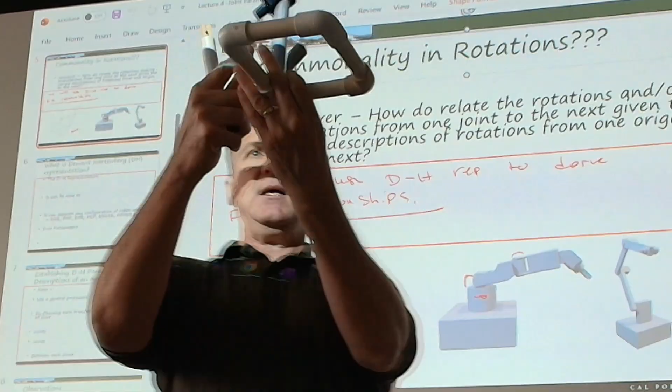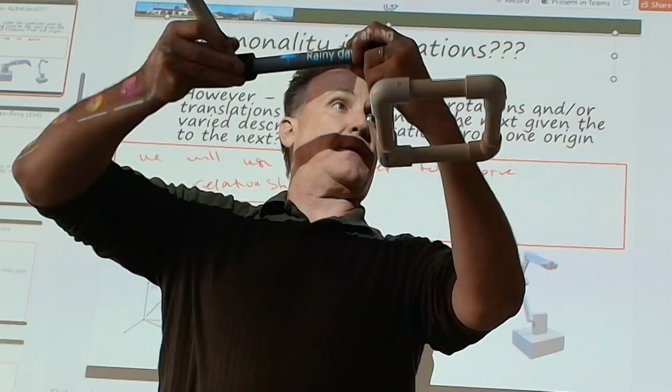And then we got into this idea of this articulated arm. In this articulated arm, I could literally say I've got a joint that's from this base that's going to spin like this, right? And like this, and like this, and these could both. I mean theoretically I could have these two be two separate articulating joints if I wanted to, right? I could do this. There's a lot of degrees of freedom in this robot. And it could be cylindrical, it could be spherical, or some combination thereof, right?

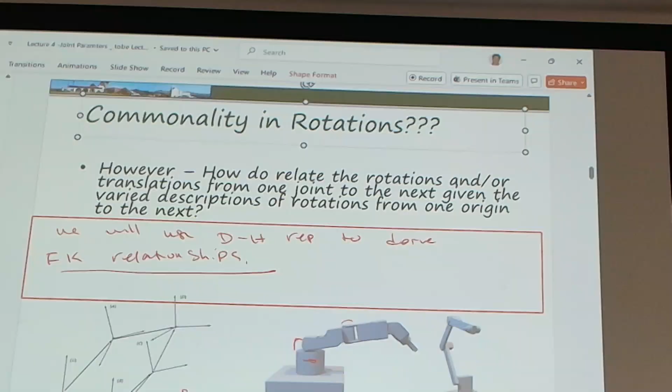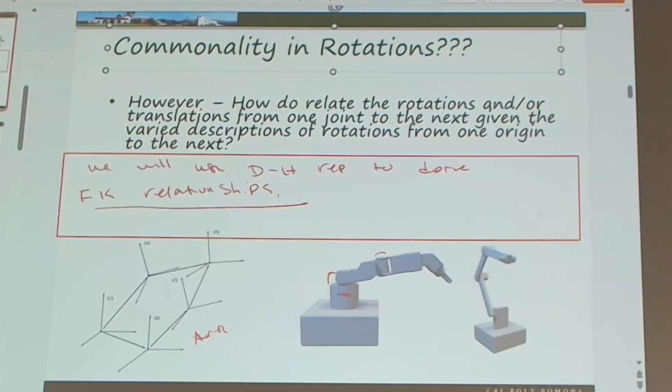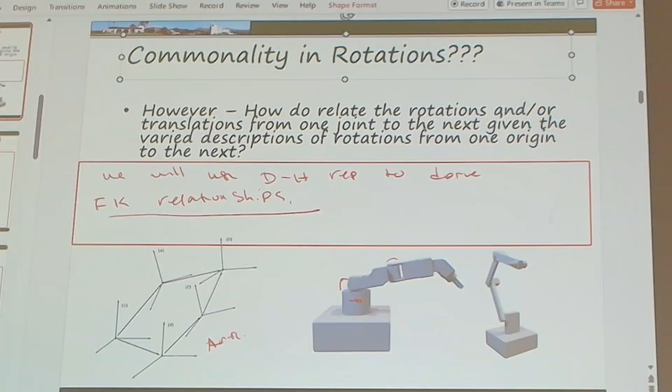So the question is how do we succinctly, how do we concisely describe the parameters relative to one another for the forward kinematics? Because as we saw, if this was the orientation and I'm going to move this one and then this one, it would be a planar robot. But if that one could move, now all of a sudden it's no longer moving in that same plane, is it? So I've had to somehow capture what that twist was, and maybe it's a fixed twist. Maybe it's not even a joint that's allowed to move, maybe it's just rotated. So now this one moves this way, and this one moves this way. So how do I describe that twist from this joint to this joint?

If I said it's not a controllable joint, it's just fixed - I mounted the motor 90 degrees. Remember when we were building the arm in Coppelia and we rotated that motor? This has got that joint motor rotated by 90 degrees. And that reminds me, I owe you guys a video to post. If I don't do it, someone feel free to send me a note saying I forgot to give you guys that video. But that's what's in there, right?

So how do we describe that? How do we express the relationship of that twist? It's not a joint that's moving, per se.

How do we make the difference between this axis rotating and maybe this does rotate that way? I mean, there could be that relationship.

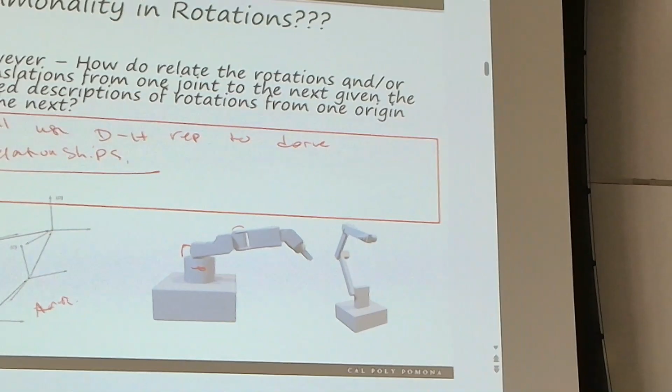So how do we do that in a repeated manner? That's where the Denavit-Hartenberg representations come into play. So when we look at this, what is the Denavit-Hartenberg representation?

So the DH parameter representation... okay, so it's a simple method, and I say simple in quotes because I think it's simple, but it could be way more complex. But it is a method. I'm going to still say a simple method.

Once you get the hang of it, you'll say simple as well. It's a way to model how robot links and joints - and when I say joints, it doesn't matter if the joint is prismatic or revolute - regardless of configuration to one another.

That's what Denavit-Hartenberg is striving to achieve. That's a very big statement with a lot of dependencies behind it. So, well, we understand what those letters and words on that page mean. Putting that into practice is obviously going to be a bigger picture.

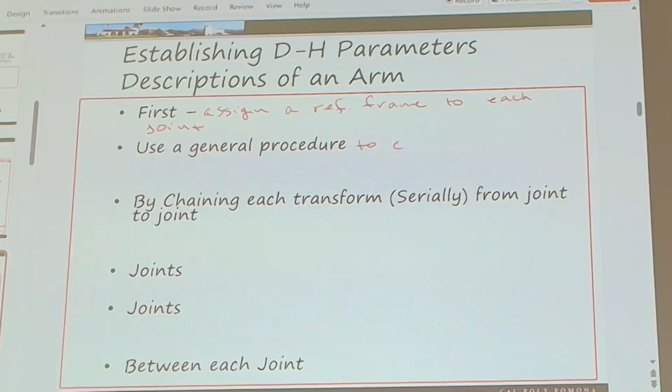Then what we're going to do is use a general procedure to create a transform from one joint, from joint J, to the next joint, J plus 1. So we're going to assign a reference frame, and then we have a general procedure which allows us to connect one joint to the next.

So we have this joint here, and this joint here, and there could be a twist in that joint relationship. There could be a link in that joint relationship. We want to capture that characteristic - which way we're rotating, if we're going to rotate about this joint, or maybe there's a prismatic joint that's going to move along, having linear motion. We want to be able to capture all of that.

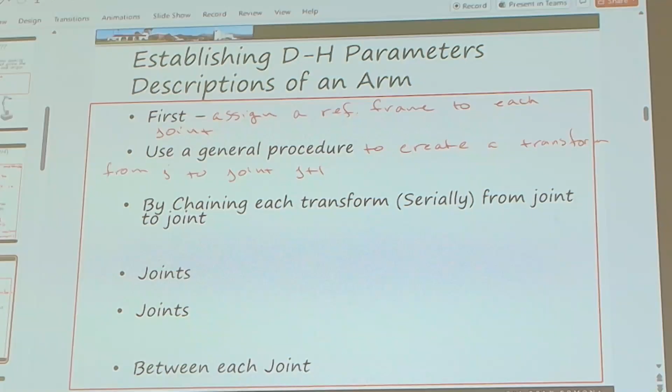So that's our objective. And so what we're going to do is chain one joint to the next in a serial fashion. This is why this is called serial kinematics - that's the whole idea here. So we are chaining these transforms, and this is where we get the expression serial kinematics. We're going to do that from each joint, from one to the other.

And by doing so, we create the robot's overall transform.

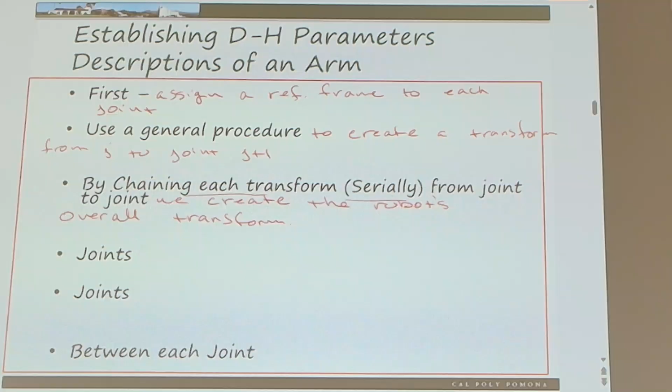So if I have a transform which describes relationships from this joint to this joint, to this joint, and so on, from the base to the tip, I can multiply each one of these transforms together and thereby have a transform that represents the entire arm. So I can describe, through all these joints, that spot that the robot's currently touching.

And if I want to apply a certain set of forward kinematics, I can move it from this point, say down to picking up something over here. I can say I want to move it to over here. I can apply another set of motions to make it go over there.

I can also arrive at what that transform looks like by solving for the inverse kinematics. That is, I can solve this given the two points, this point and this point. Remember, the inverse kinematics solves that transform matrix, how to get there. And if I do that, I can decompose each one of these from that one overall matrix, and figure out the next successive transforms themselves.

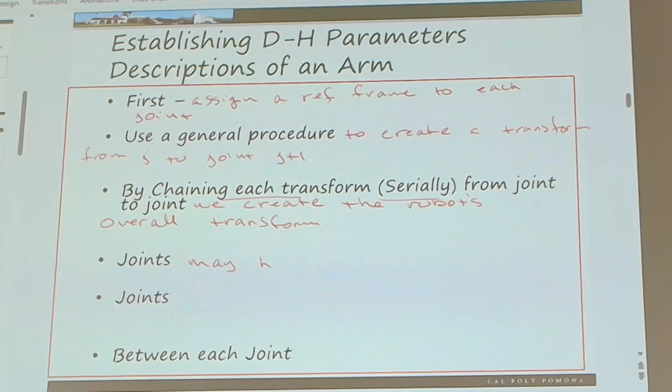So we have to ask ourselves, what in fact is a robotic joint? What is a robotic joint? A robot joint may be prismatic or revolute. Prismatic, if you recall, that's linear, and revolute is the rotation. But we don't call them those, we call it prismatic and revolute.

Moreover, each joint, and this is a constraint we place for the DH parameters, is considered to only have, this is key, one degree of freedom.

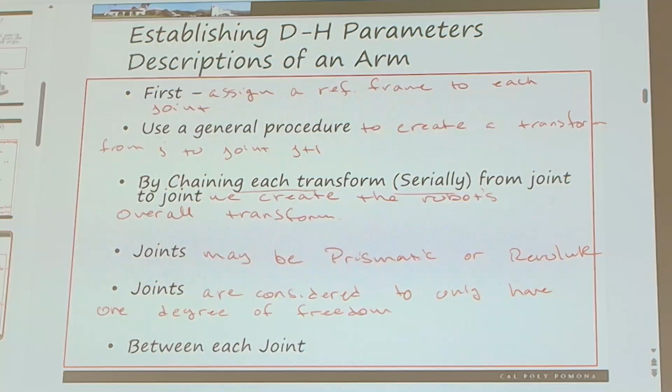Between any one of these two joints, so for example, I have a joint here and a joint here. Let's call this joint 0, joint 1, joint 2. Between joint 1 and joint 2, I have a link. I have a joint, I have a link. Everybody with me on that? So, definition of terms: between each joint is a link. What's between each joint? A link.

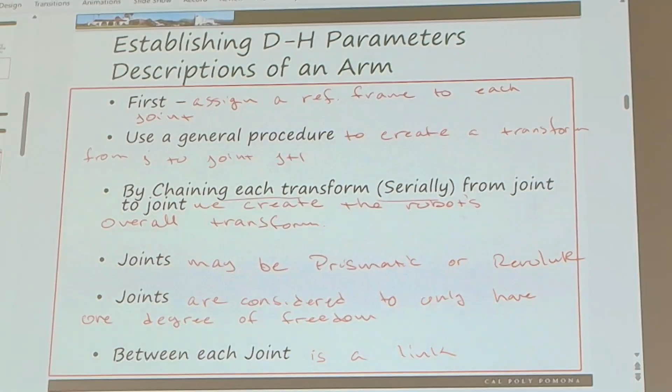What kind of joints can we have? Revolute. Prismatic.

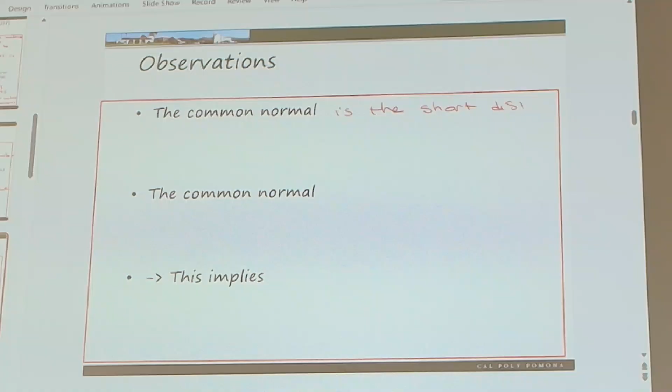Couple of observations. A common normal - what is a common normal? We're going to define that for you guys right now. The common normal is the shortest. In fact, let's just think about what this is. A normal is a perpendicular, right? Perpendicular between things that have something in common, right? So it's the shortest distance between any two mutually perpendicular lines.

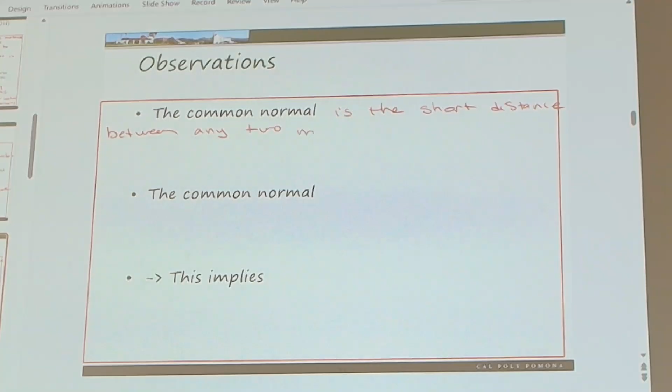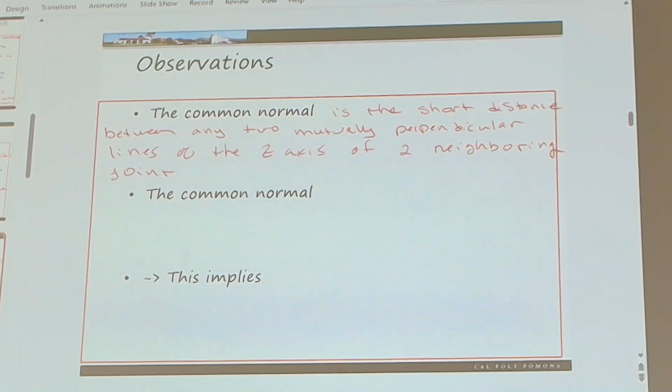The common normal, the normals - so that's kind of the plural, the common normal - are not necessarily at an intersection or collinear.

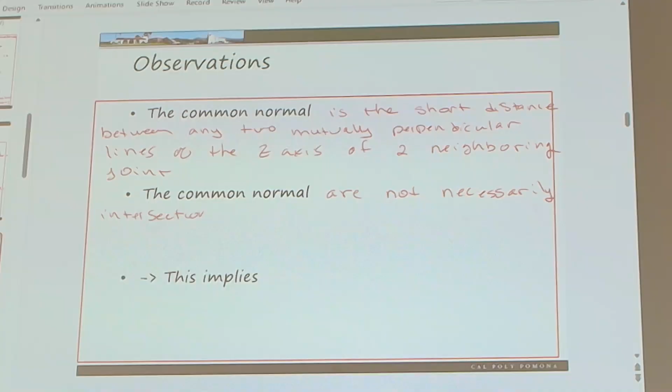And what this implies is that the origins of two successive frames may not be at the same location.

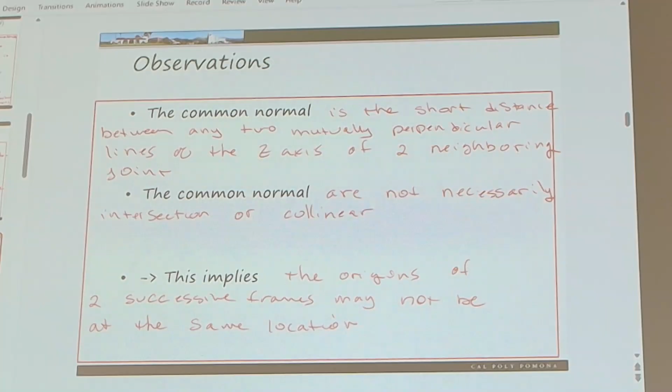And that makes sense, right? The frame for this joint is not the same location as the frame for that joint.

It could be though. Wait, what? What it means is we'll find out that when I do a rotation, does it matter if I say it's rotating here or if it's rotating here? Doesn't matter. But this guy clearly is not rotating there, right? So the way I have this planar and this planar here, they're not rotating - they can't rotate. But if this has a rotation joint here, I could say it's actually rotating at that point and rotating at that point, not necessarily down here. That translation doesn't have a whole lot of meaning to what I'm going to do for the rotation. Okay, we got that so far?

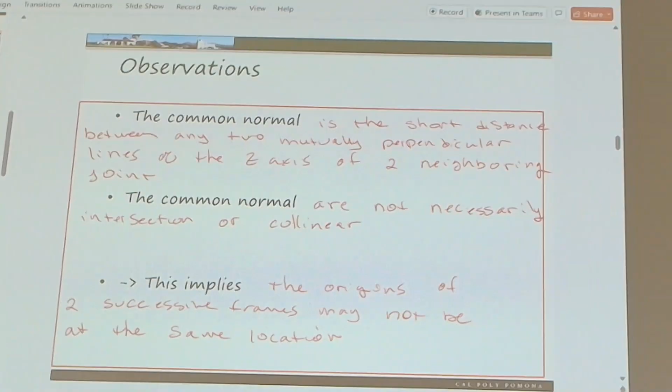In that case, would there still be a link between the two guys? Not necessarily, we may not have to worry about it. We can ignore it. Yeah, exactly, but there's one right there. No, not necessarily, it depends on how you define it.

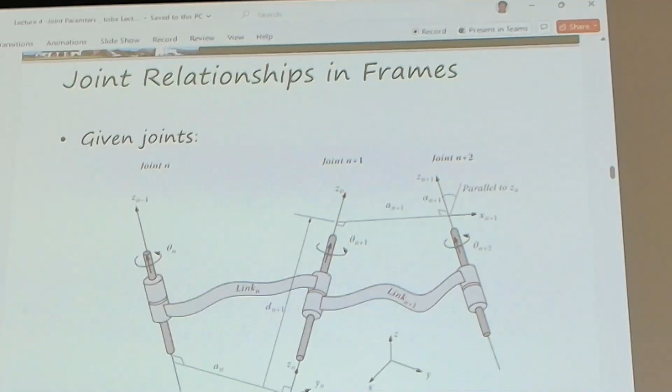So let's talk about this diagram that gets everybody confused. We're going to spend some time on it. This is why I used to draw it as part of the lecture. I don't do that anymore. I don't know if it's good or bad to not be drawing it. In some ways it did help, because as I was constructing it, I walked through it. So by all means, if you want to draw it, please do so.

What we have here is joint N. Let's just say that joint N is down here, and that joint is revolute, right here, so it's doing this. N plus 1 is going to be right here, and it's rotating like this. N plus 2, or that joint—I could have said this is N plus 2, and this is N plus 3.

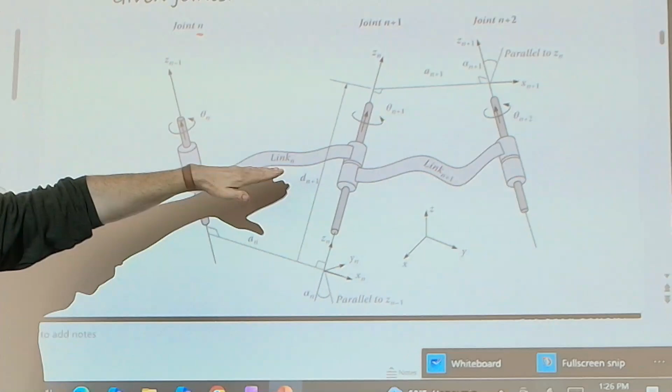Between each joint, joint N and joint N plus 1, I'm going to have link N. So I have a joint connecting a joint, and notice the diagram shows this perpendicular line here—totally different axis. This is a right angle, and this is a right angle. This is that mutual perpendicular, perpendicular to both z-axes. It's the shortest line, isn't it?

That is going to be what we call our link length, and we'll write this down in another slide. The link is not the traversal length—it is the shortest distance between my two z-axes. For joint N, I'm going to have a theta N that I'm rotating.

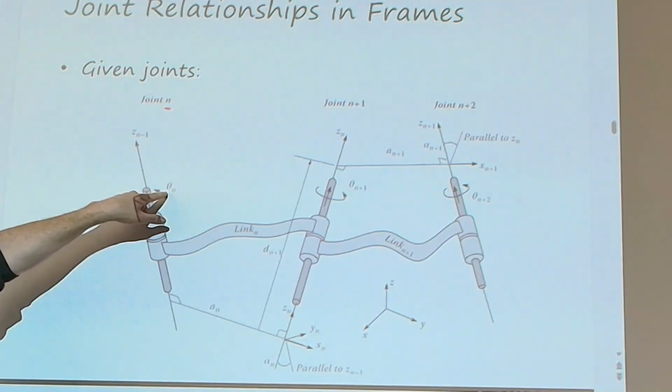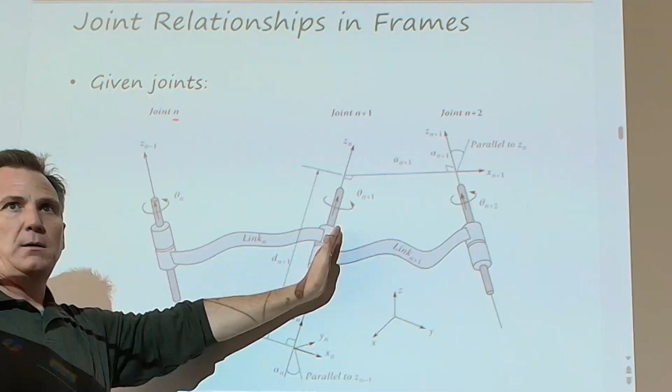Now, what I'm describing is the Niku notation. If you were to look at Craig, the subscripts are different. In Craig, this would be n, and this would be n plus 1. This would be Zn plus 1. In Niku, we're looking forward as our n—we look back and look forward. In Craig, we're continually looking forward. It's the same thing at the end of the day, and you'll get really comfortable with it.

But if you look at the Craig book, which is probably one of the most popular robotics books that exists, Craig uses a slightly different notation. I've lectured both in the past—I started with just Craig and then went to Niku. I don't know which is better. A couple of years ago I just switched to strictly Niku and explained the differences. I want you guys to be aware of the differences used in literature, because there is a difference—neither one's wrong, neither one's right. It's simply a matter of perspective, and where you came from and where you're going, when we describe the serial connectivity from joint to joint to joint. Everybody with me on that?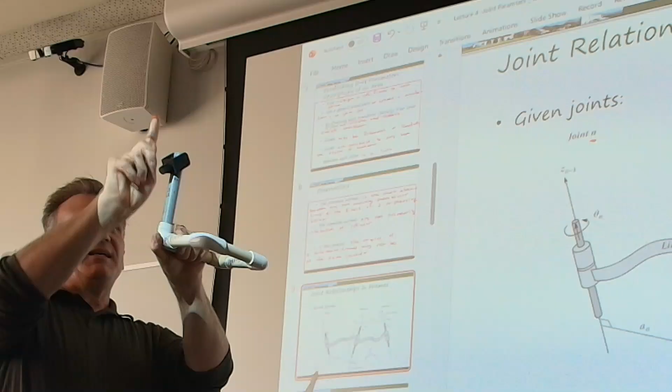So notice we have this z-axis for joint N, and it's about Zn minus 1. I am about theta n, so that joint right here has a motion. This is isolated—it's this guy right here, it's turning this guy right here. My z-axis is coming up. Everybody see that? Zn minus 1, my theta n axis. This is joint n, I have theta n.

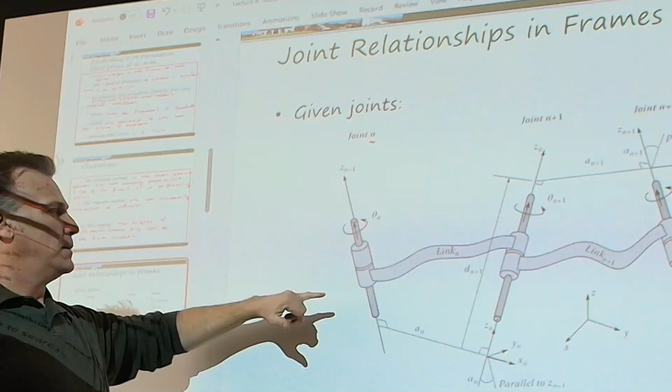To get to joint n plus 1, I have this common normal between my two z-axes. This is the link. Between the two z-axes is the link. This is the joint displacement, theta right here. It rotates about the z-axis. In fact, every joint motion is about the z-axis or along the z-axis.

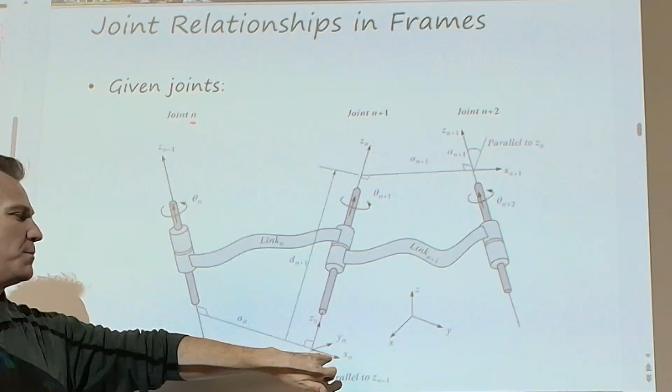Now, to get to this orientation, z is pointing this way, now I have a z pointing that way, so I have a rotation about some axis—in this case it's going to be my x-axis. It's rotated about my x, and there's my x. Here's my z. I'm going to rotate about my x-axis to get to the new rotation, by alpha. That's alpha n.

Wake up. Here we go.

Again, my mutual perpendicular, A, is the distance between my two z's. So I have frame n minus 1, frame n. All motion is about my z-axis, or taking that common perpendicular. If I displace along z, that displacement is known as d.

So my displacement along z is d. My joint displacement, if I had a prismatic joint moving inward and outward, that's going to be by an amount d. So my joint can move about z, along z. The axis we control is the z-axis.

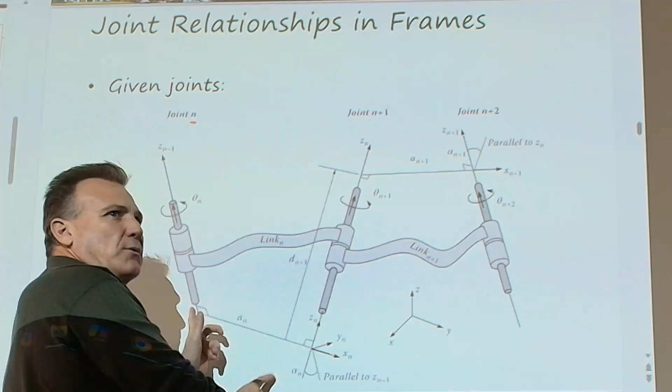That is the axis of motion. The axis of link to link is going to be along this guy here, which we make our two x-axes co-aligned. We make them co-aligned by a twist, alpha. Twisting by alpha is a way of aligning my x-axes so that my z's are pointing in the right direction.

Here's my joint. My z is going to be coming up here. I'm going to build the arm as we go. Now all of a sudden this guy is rotating this way. It's no longer rotating this way, right?

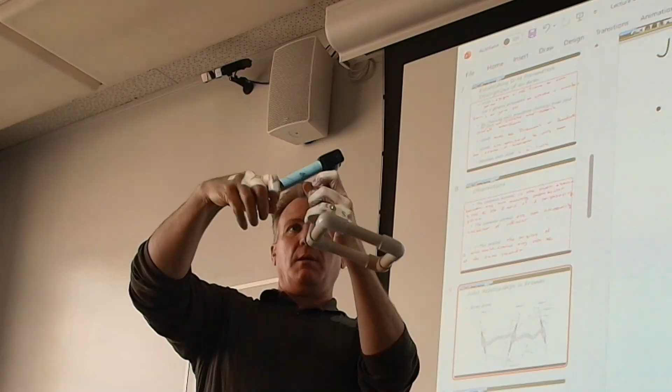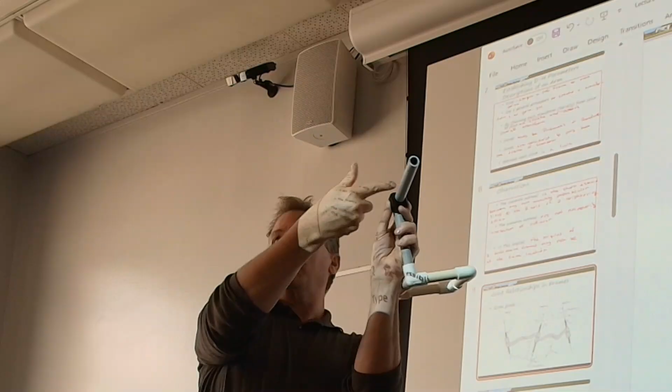It's rotating this way. So where's my new z-axis? It's coming through here, right? My z-axis is literally through the joint right here. So z went from here to here, following the right-hand rule: x cross y is z.

What is doing that rotation is alpha. It's the twist in the joint. So this has a 90-degree twist going from the vertical to make it into this direction, so that this is my joint, which means I have to rotate about z.

If I'm going to rotate about z, that means z has to be this direction. How did I get it in this direction? I rotated alpha by 90 degrees. I also have this A sub n, that's this length right here. If I had a displacement inward and outward doing this, then that would be my z-axis inward and outward.

So that's the idea of having this z. Motions are about z. The physical structure is about x. Professor, but what about y? Can't I do y? Yes, but no.

We'll get to y, and we'll see an example - I'll give you guys this in the book. By rotating an additional 90 degrees about x, that is 90 degrees. Remember, I'm rotating about z, right? If I'm going z and I want to add 90 degrees, what does x become?

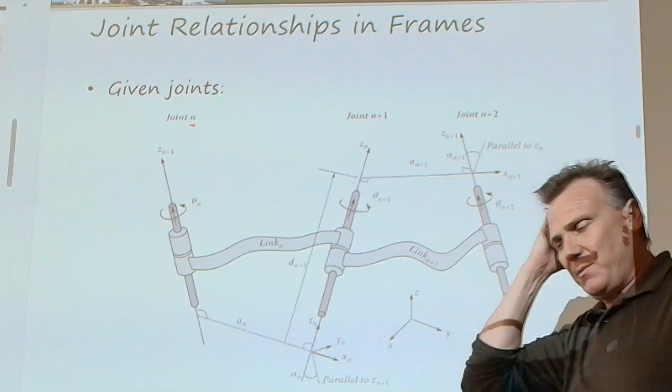What's my transform to rotate about z? Upper left corner is cosine theta, then minus sine theta, 0, Px. Next row: sine theta, cosine theta, 0, Py. Next: 0, 0, 1, Pz. Then 0, 0, 0, 1. There you go, that's the rotation matrix, the transform.

Wake up - it's because I don't have it plugged in. It doesn't like this power supply going through here. I know it didn't have a battery, I charged it last night - at least I thought I charged it last night. Yeah, I've got plenty of charge. There we go. Okay, where are we? What I should do is just plug in a different one. Well, it's waking back up again. Let's just do it higher for this guy. I'm just going to plug it in right here.

All right, so I can rotate. If I take a transform of this rotation of theta, I can do that, right? And instead of saying cosine 90, my variable, my joint variable of how much I'm rotating becomes theta, cosine theta. Now, alpha, that may be fixed, and generally is fixed.

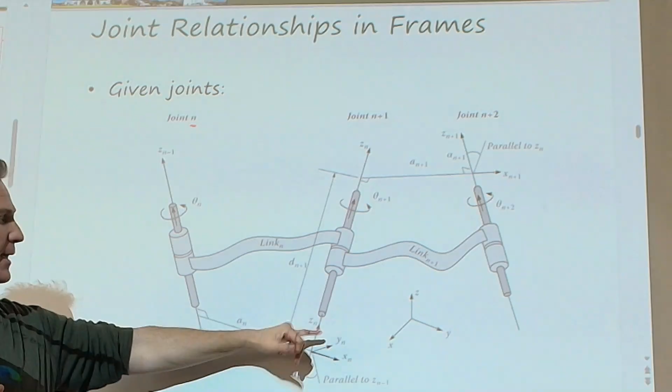And if I have to rotate about the y, instead of it being cosine theta or sine theta, it's theta plus 90. Problem solved.

Now, I said sometimes we actually move along z. If I have an offset, if this joint and this joint are not right here, but this link actually had some spacing between it, then d would have a fixed value. It's no longer the joint variable of traversal, it's actually some offset. Sometimes that gets students confused, and sometimes I might have that traversal, and I really do have a theta as a fixed value, because I did rotate about, I have an angular offset now about that rotational joint.

So it's not always this or that. Sometimes we might see both. Sometimes students don't realize that and don't feel bad. When I was an undergrad student taking this class, I was like, oh, it's always a 0. No, it's not. Or oh, it's always this or it's always that. No, it's not, it could be both. I won't talk about the instructor because he just didn't explain that.

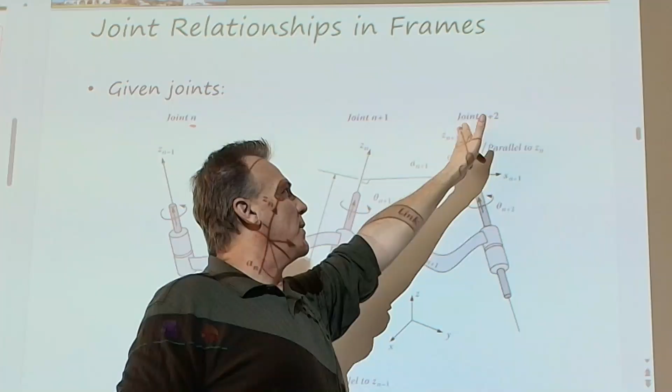But anyways, nonetheless, then we rinse and repeat as we go from this joint to this joint. So now we go to joint n plus 2. Again, Niku's notation has us the n minus 1 from that joint. So this is always the z minus 1. And this is where Craig and Niku differ, just kind of giving you the heads up. Same concept, same process, it's just how you identify going forward or going backwards.

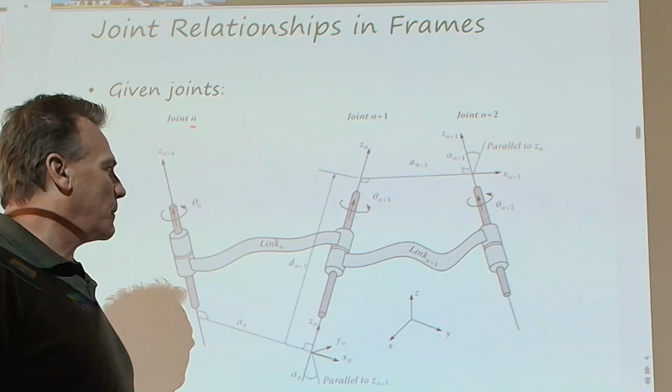So there's always a link between the two. Well, there doesn't have to be. What if this had a rotation? What if I said, you know what, I don't really care about this part, it's not doing anything for me. It's going to rotate, and then I'm going to have an alpha twist right in it. I could put that together, believe it or not. So those actually can combine.

We'll see an example. We're going to do a lot of homework examples on this one, this whole concept. But this is serial robotics.

All the stuff we've been doing up to this point has been describing the concepts of forward kinematics, the concepts of inverse kinematics, the concepts of a transform. Why do we need to have transforms? What is a rotation? Why does a rotation work? Why is rotation nothing more than the projection? All that stuff has really been a tool to help us identify these diagrams.

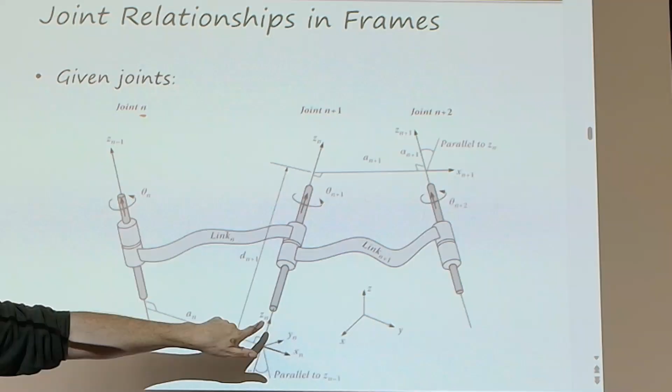Everybody with me? I have a question. Yes, sir. When we're talking about alpha, alpha n specifically, that's the angle between the two z-axes? Yes, it is. Actually, it is. It's exactly what we're showing.

Okay, everybody with me on that? Like I said, sometimes I used to draw these. I don't know if it's better to have it pre-drawn for you, trying to understand my chicken scratch, or if it's better just to see it already done. You guys tell me, what would you prefer? Already done. Okay, fair enough.

And this is the diagram from the book as well. So if you were thinking it's the same, it's the same. So notice that we have... You guys can see the pointer? Yeah, so notice that over on this one, the mutual perpendicular is right here, right?

Shortest distance between two z's, that's what you want to think of. So here's the z, and here's the next z. There's an alpha twist about the x. It's kind of hard to see that in here. You just have to kind of say, okay, I get it.

I'll be honest with you, it's not as... 100%. One of these days, I'll actually create a 3D model that allows you to play with this and stick it in here. I haven't done that yet. That's on my to-do list. Usually, I always get usurped by any number of other things I have to do. So one day when I have absolutely nothing to do in my life, I'll probably do that. The likelihood of that happening is probably 0 to none.

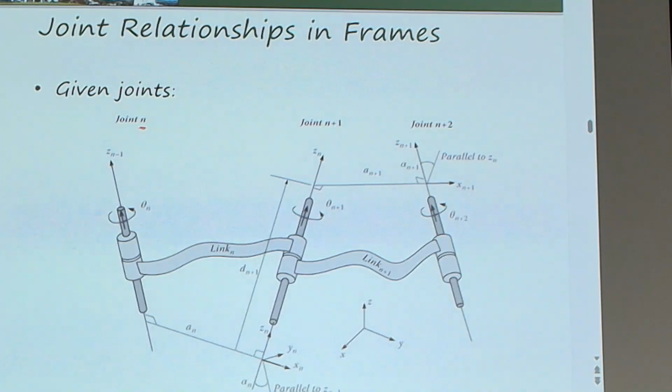Okay, so let's talk about this next one. So, what can we say about this? Z-axis from the joint frame. All joints are rotated or translated.

So these are the conventions, as you might want to call it, in movement, about or along the z-axis.

As you were seeing from the diagram, you can still see it below. It's the same one, if you're curious. I just shrunk it down.

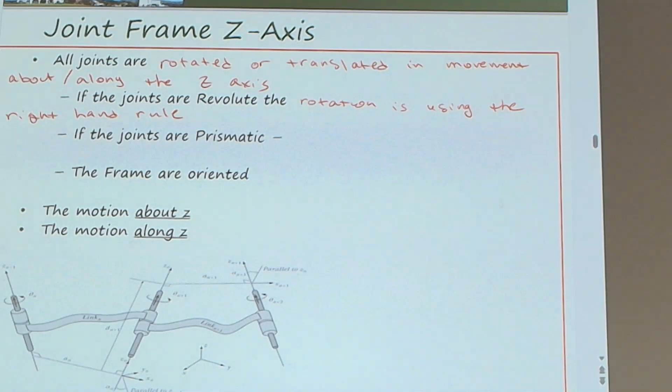If the joints are revolute, the rotation is using the right-hand rule. This is Z, so it's going to be using X cross Y, so it's doing this, i.e. counterclockwise. Right? Was that counterclockwise? X cross Y. Funny story about that, I'll tell you in a second.

If the joints are prismatic, the elongation is along the z-axis.

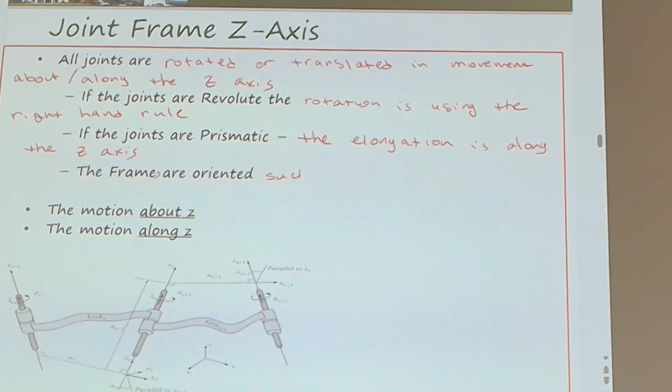And the frames are oriented such that the motion of the joint align in this manner.

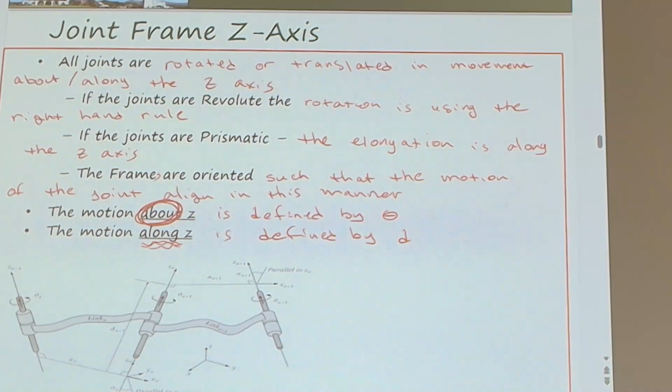The motion about Z is defined by theta. The motion along Z is defined by D. So we've talked about theta, we've talked about D. These are the official things. So this is the Z-axis. Everybody good on that? Make sure you're all written down.

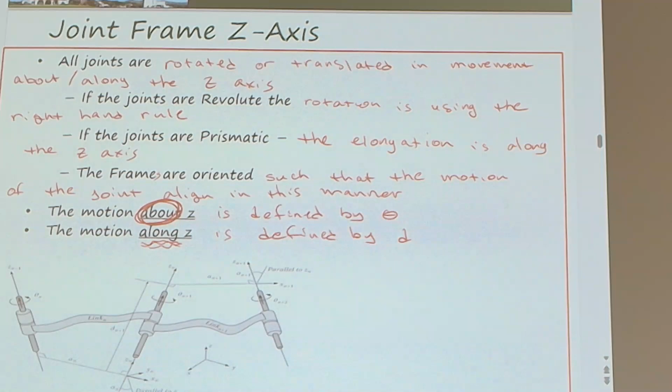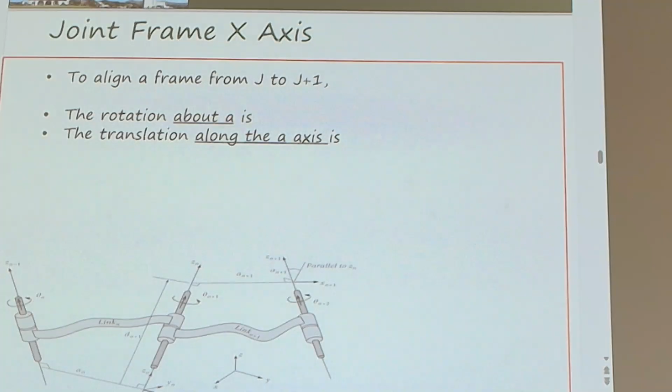In contrast, we have the X frame. So the X frame from J to J plus 1 is used to align. So we're using the X axis to align and translate from one joint to the next. So the X axis is to align the frame from J to J plus 1. We want to use the rotation

About - we use A because we're using N, O, and A, but we're going to call it X - rotation and translation. So rotation about and translation along. So again, this is using the other format, but it's also known as X. To me, I'll always think of it as X. I have a hard time with the NOA approach, just because I prefer XYZ.

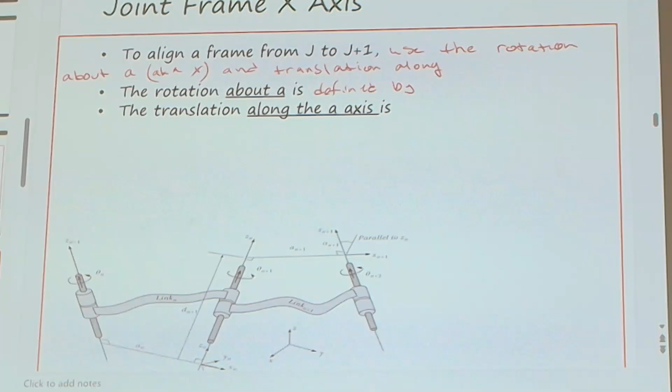The rotation about A is defined by alpha, and we call this the link twist. Whereas the translation along the A-axis, this is defined by A itself. That's why I don't like using that NOA, because it gets confusing. It's known as the length.

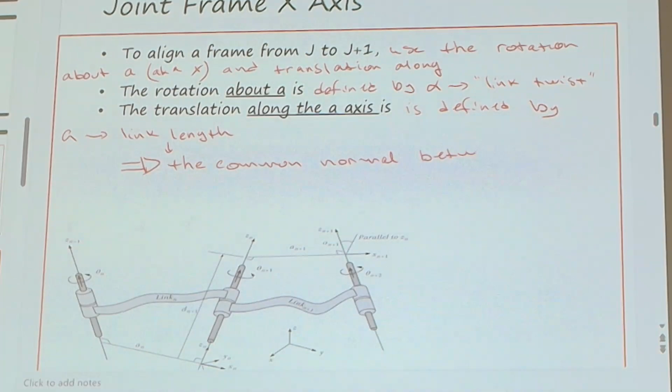This length is the common normal between the two joints. I don't care how curvy and wiggly or anything else we have about that. We're not doing path length. We're doing the shortest length distance between two points. Same with, by way of the crow flies, right? That's what we're talking about. That's the shortest distance between the two z's, i.e. the common normal.

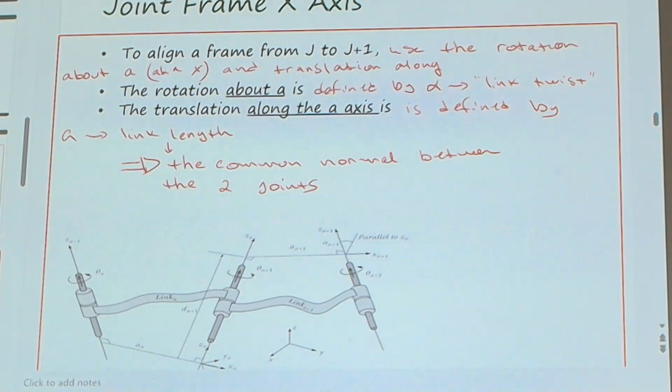Is that the A-N at the bottom there, between joint 1 and joint 2? Yes, that would be this guy right here. I think we talked about it before you walked in.

So we have A, alpha, D, theta. That's it. We have twist, length, then we have displacements of theta and displacements of D.

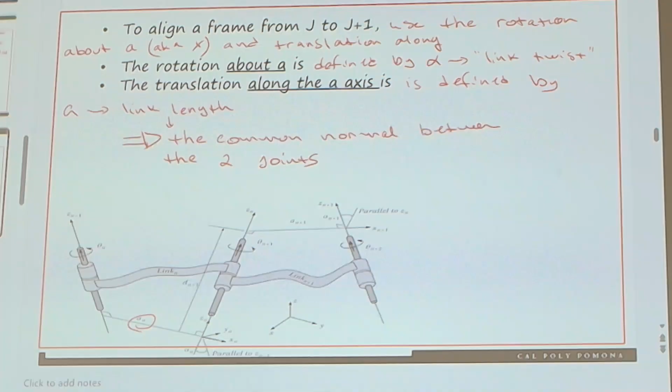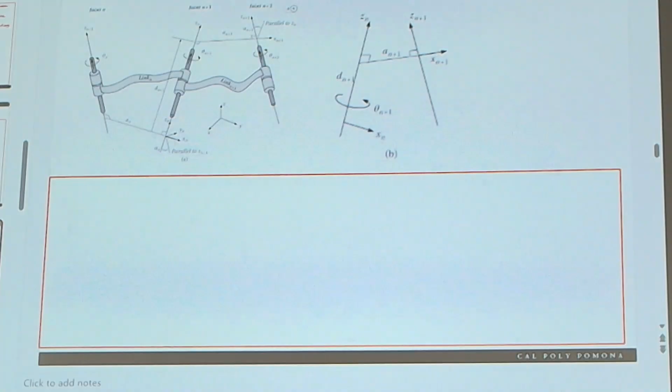So if we're looking at it from one joint to the next, how do we relate these two together? So we have the picture that we have right here. This is our starting point. And how do we relate the two joints, Jn to say Jn plus 1?

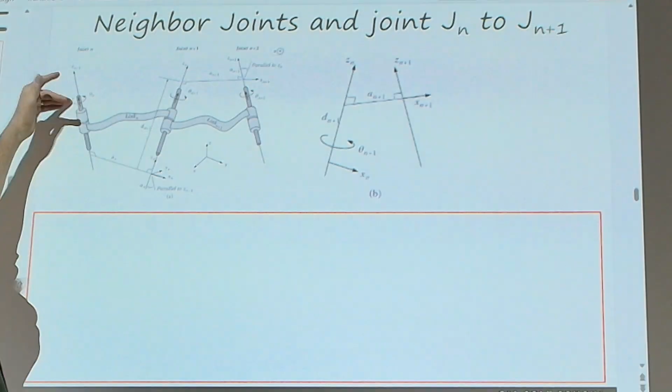So that's what we want to do. So we're starting with this one. We really want to go to the next. We were starting at this joint. We want to get to that one. So how do we use these A's and D-n-plus-1's and theta-n's and X's, Y's and Z's and everything like that to do this operation, to do this relationship?

And so what we're going to do is we're going to rotate our Zn axis an angle of theta n plus 1, such that xn and xn plus 1 are parallel.

So you want to go from n to n plus 1, so we're going to rotate about that Zn by some theta, and this is where it should be theta n plus 1. This is where it gets kind of confusing. So the next theta, so to speak, so that the xn, where I'm at, and where I'm going, are parallel. So far, so good.

Then, now that we've done that, we're going to translate along our Zn the amount of Dn plus 1, so that xn and xn plus 1 are collinear. So we're going to translate along Zn axis. And it says angle in the source note, it should say an amount of dn plus 1, such that xn and xn plus 1 are collinear.

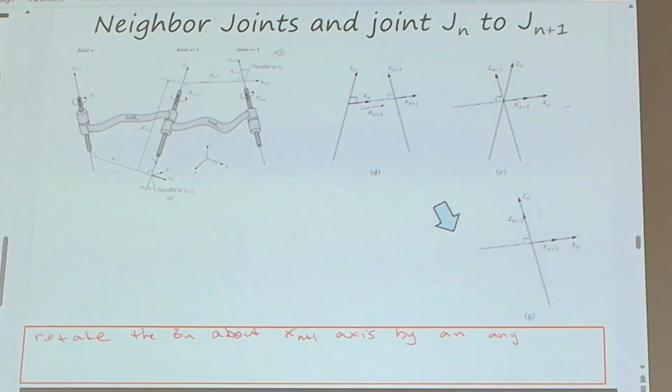And then last but not least, we rotate by an amount alpha. So we rotate our Zn about the xn plus 1 axis by an angle alpha n plus 1 to align the Zn and Zn plus 1 axes.

So if I look at this in totality, we go through each one of these steps. So we do a rotate, translate, rotate, etc. on each one of these individually. We rotate a theta, we translate a D, we rotate an alpha, we translate a length.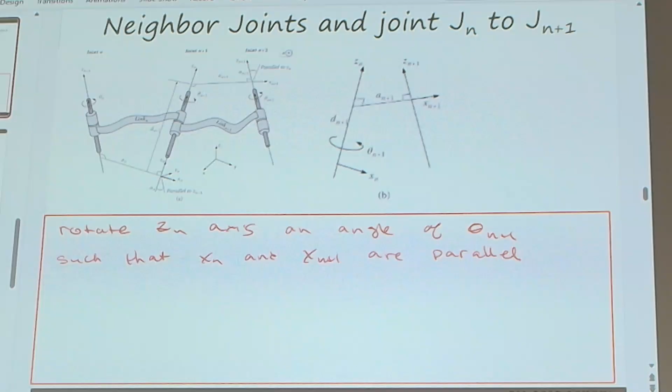Can we write the order? They're in the slides. The slide order is the steps, A, B, F. So that's what we see right here. Each one of these is those orders. Here's our starting point, and we do each one of these. This is just all of them together.

So far so good. We're just trying to get everything like, okay, what do we need to do to get from here to here? That's really what we're saying. We're constructing a transform, right? Isn't that what we just did?

We talked about the displacement and the rotations to get from one place to the other between the two axes, x and z. And again, in y, it just goes along for the ride with a theta plus 90. So if we need to rotate about y, it's theta plus 90.

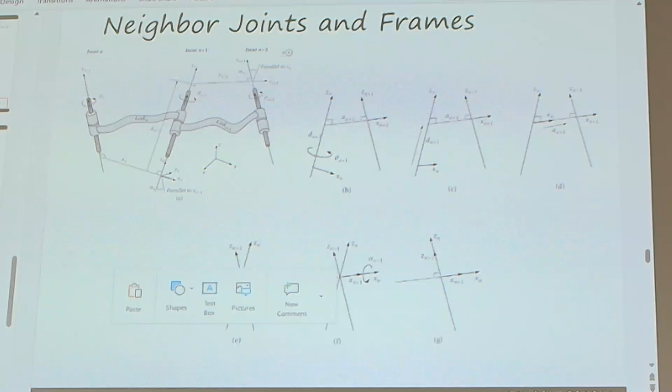So when we're looking to create a general transform, there's really 4 baby transforms or subtransforms that we've chained together. Rotating about z, by theta n plus 1.

Translate along z by dn plus 1. Now again, quite often, if there's no offset between the joint and the next joint, which is very common in robotics, which is what we have right here, we might oftentimes say that rotation to this rotation is in and of the same, it's the same spot, so D is basically 0. Not always, but quite often. So that means that D is not really there. It's there, but a lot of times in the examples it doesn't show up because we're assuming them to be right on top of each other. But there could be a small D.

Rotate, that's the 0. Then we had an alpha of 90. So now my Z is going to go inward and outward like this, to me.

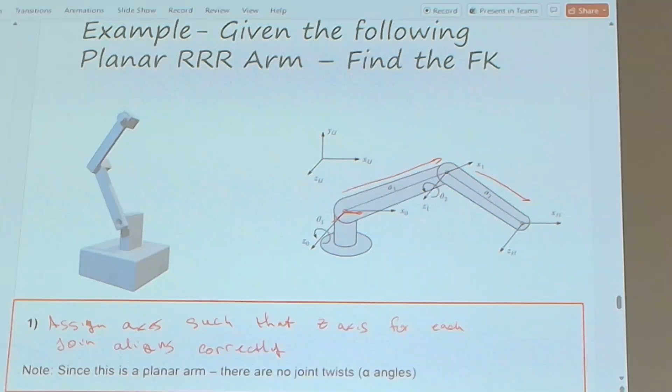So here I defined my basic, or my basis, right here, my base transform from on that joint. I didn't do it down here, I did it up here. I could have done it down here, but then I have to do a bunch of silliness. I don't want to do silliness, I'm going to keep it simple. So I'm going to actually do it from this point. So I'm going to have my A1 and my A2. I've got my theta 1 right here, my theta 2 right here, and its Z-axis right there.

It is easier when you draw these arms, to be honest with you, if you draw it more like this, instead of putting that angle in there. It's the same thing, it doesn't matter, but it's just sometimes easier to visualize. So we see the Z's coming out, we see this guy coming out, and so on, and then we have the hand.

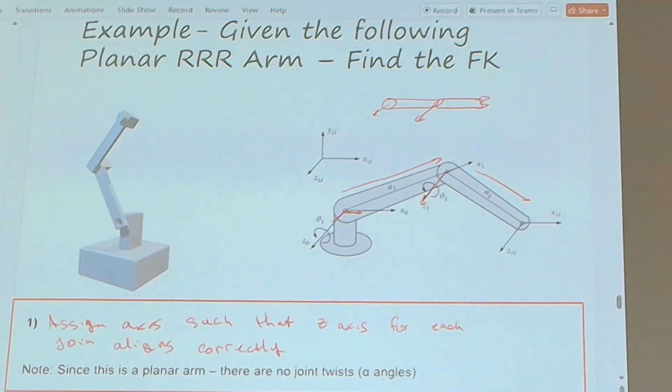Everybody see that? So if we have all of our information, we can actually build what's known as our DH table. And so what we're going to do is, I skipped the slide. We construct the table. Following...

The RR, maybe there's additional R, arm. Okay, so what we see here is our table. Construct the table for theta, D, A, and alpha.

To go from 0 to 1, so Z0 to Z1 is going to be a theta 1. Joint number 0 to 1 is a theta 1. We're going to assume there's no offsets between rotation and displacement. Is that fair? What that means is that along that Z there's no offset, so we're going to put that as 0. To go from joint 0 to 1, we're going to have an A1, so we're going to go to that next member. This is where you get into the subscript notation. So this is the 1 for Z1.

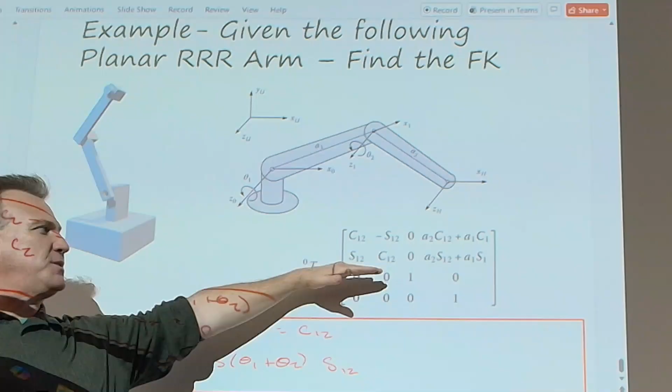And it's still very similar. The reason why is we have only rotations about the z-axis, which is why this looks like a z transform, doesn't it? Because we're only rotating about z. If I had a 90-degree twist, then I would see that twist showing up here, and it wouldn't necessarily be this simple. But because we're a planar robot, we don't see that.

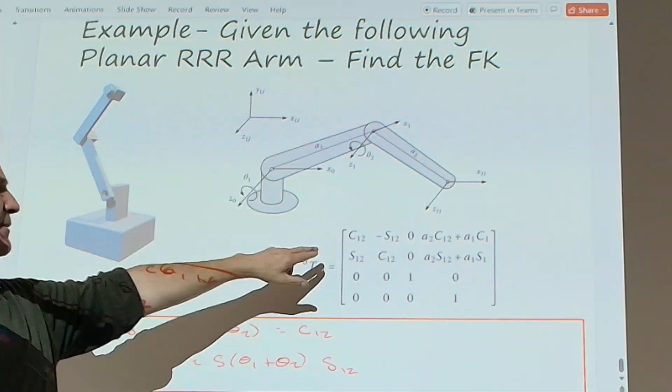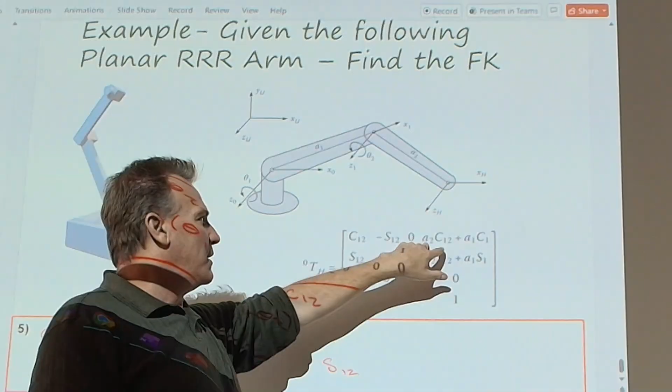So we can write some of those simplifications: cosine 1, cosine 2. If I had more than one, like maybe 4 joints, and they were all planar, I'd have cosine 1,2,3,4 minus sine 1,2,3,4, sine 1,2,3,4, cosine 1,2,3,4. These would all be zeros because it'd be planar about z. And then here I'd have a whole bunch of stuff. So I won't get into that one. Does this make sense so far?